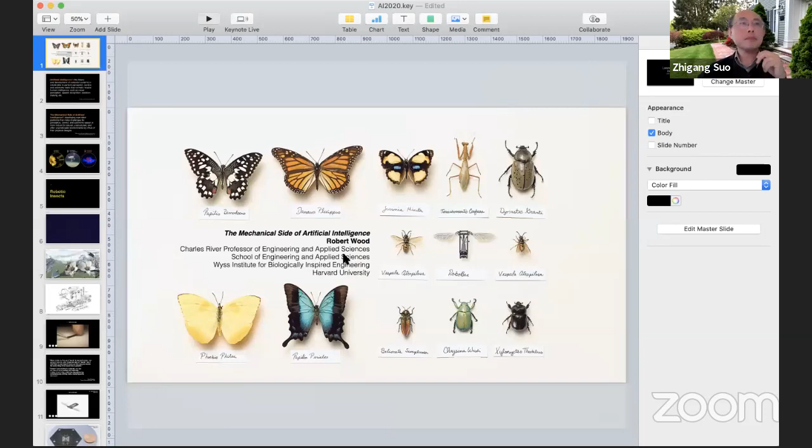Beautiful. Okay, so I'm Rob Howe, and I'm Rob Wood's colleague at Harvard for a number of years now, and it's really been a pleasure working with Rob. I think of him as the guy who can build things nobody else can build. He works at this scale often, too big for MEMS and too small for manual machining using our usual machine construction techniques. So he's been forced to invent a whole technology for fabrication at that scale, which has reached an amazing level of sophistication. I'm looking to hear about the latest today.

It's also forced him to integrate actuation, sensing, and controls. All these parts serve multiple functions, using unique materials combined in unique ways, and the results are quite spectacular, as we'll see. Let me also add, as Rob's colleague at Harvard, that something the rest of the world doesn't get to see is that he is an amazing individual, everyone's favorite colleague. He's won awards for mentoring, for being the nicest guy, working with our staff in the School of Engineering at Harvard. So he's great in his public persona, as we'll hear, and he's also great to have as a colleague. With that, let me turn it over to him, talking about mechanics and artificial intelligence.

Rob. Thank you so much, Rob, I really appreciate the kind words. I'll note, as I was thinking about this morning, it was about 15 years ago, in a month or two and change, that I got a call from Rob when I was sitting in the lab at Berkeley, saying, 'Hey, your interview went well, we want you to come to Harvard,' and he started talking me through all the details of the school and the colleagues. So I appreciate your mentorship and friendship over the past 15-plus years now, and thank you to Zhigang and colleagues at EML for inviting me for this.

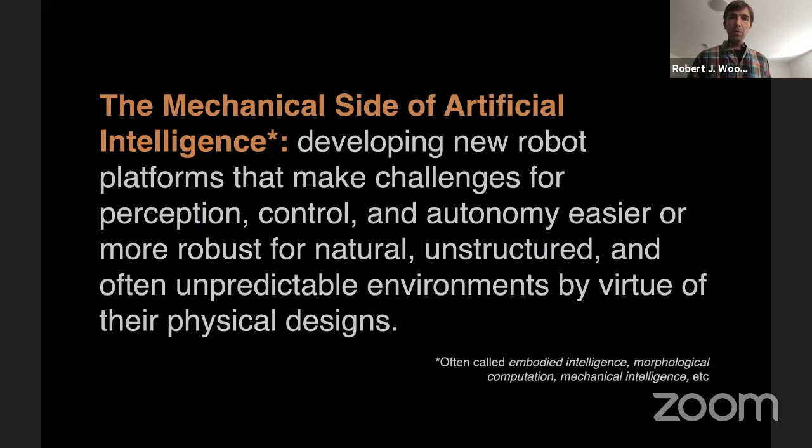I probably won't have time to get too deep into this, but historically, I'd argue this concept is several hundred years old, going back to artisanal tool development and the early days of mechanism design and construction, where there was no computation of any contemporary sort, but they could still develop mechanisms that could do really fascinating things. So it's perhaps a bit of an older concept than AI as we now think about it.

So I'm going to illustrate the way we think about these topics through three examples. The first is on our small-scale robots - some of this will be a bit old, but I'll include new, recent stuff, along the lines of creating small flying robots and small legged robots. Then the last two examples will be in the area of soft robotics, which I'll give an overview of - what that area is, what it means, what it can do, and where it's going. There will be two examples associated with soft robots for manipulation, and questions about future directions, like could we make entirely soft robots?

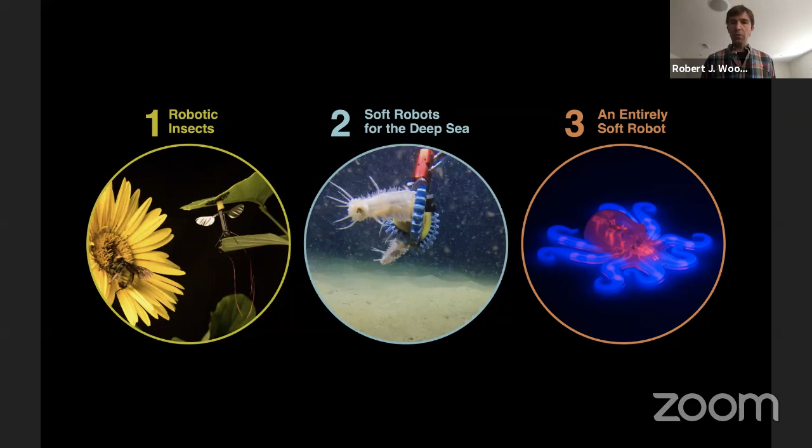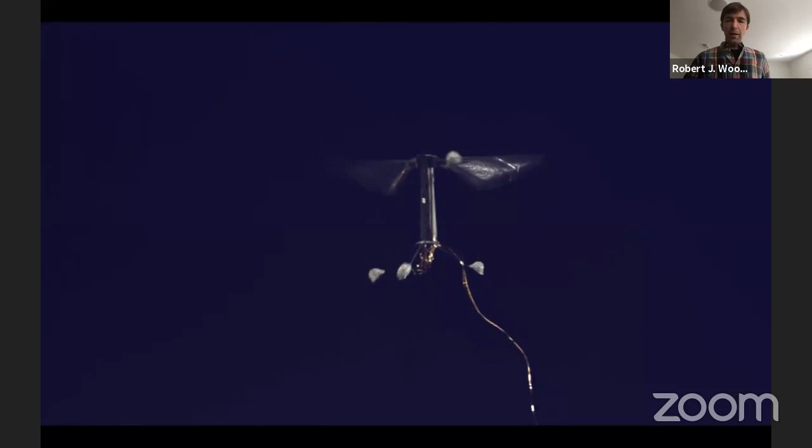So the first is robotic insects. This goes back to my PhD now, and Metin was also involved in this project quite a while ago when we were both at Berkeley, where our advisor at the time, Ron Fearing, set out to build a small flapping wing device that could sustain flight and be similar in scale, features, and flight capacity to an insect, to a fly. In this case I call this a robo-bee, but that's a bit of a misnomer because it's also supposed to invoke some of the social insect aspects that would go into future programming considerations for swarms of these things.

If we wanted to create something like that, here's maybe a vision for this - I won't really talk much about what these might be used for. In reality, we're excited about these topics because they're very difficult and require you to think through system-level questions that go from materials and manufacturing through sensors and actuators, to fluid mechanics, to control dynamics and control systems, to programming aspects, energy, etc. So these are umbrella projects which are inherently very multidisciplinary. That's what gets us excited, but you can envision scenarios for these things being used for, for example, assisted agriculture or search and rescue or other related topics.

So I won't talk too much about that. What I do want to dive into, and spend a slide each or so on, are the challenges that are associated with building something like this.

The first challenge is actually building something like this. The very first thing we started to explore was how to create something with feature sizes that range, like an insect, from centimeter-ish down to tens or hundreds of microns in characteristic dimensions.

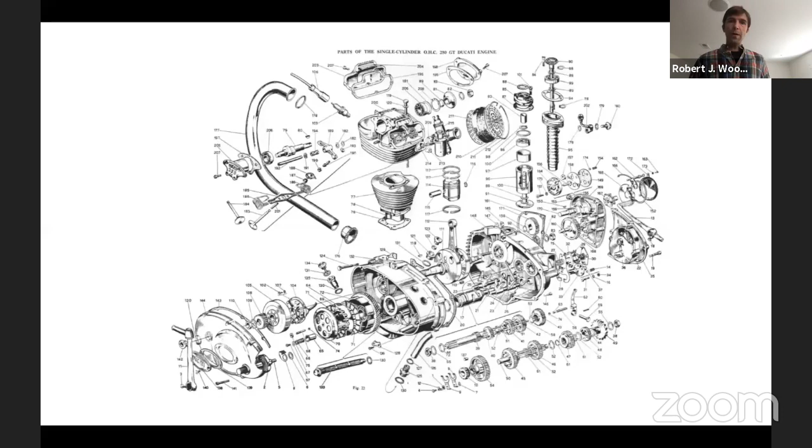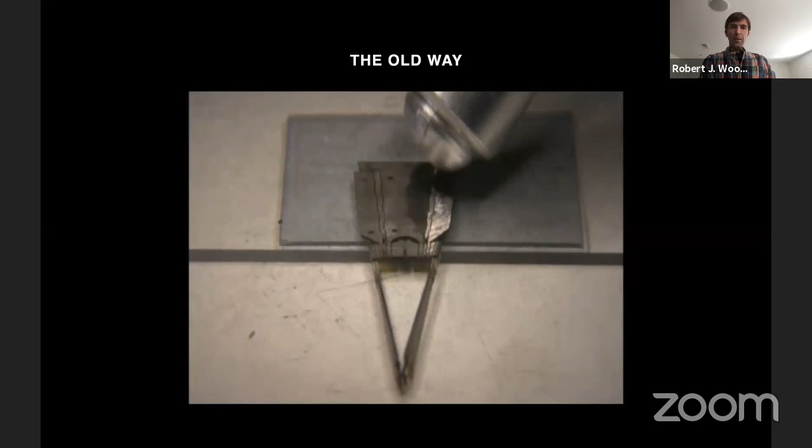And this is a bit of a contradiction of what I just said — this is how we used to do these things. About 10 years ago, you'd have a graduate student painstakingly assembling individual components under a microscope, requiring tremendous dexterity and patience. I'll show you in a moment how those individual components are made.

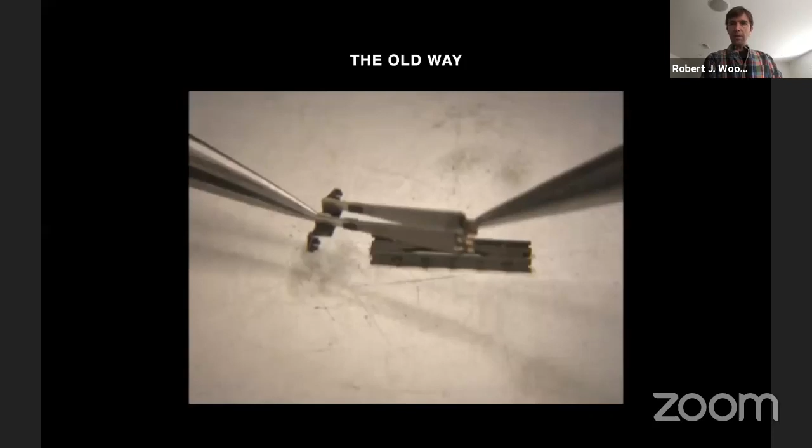This process is also called the 'graduate student with tweezers' process, and it's frankly not very good for graduate student retention. It takes forever to build up the skill to do this, and the precision and yield are not satisfactory. It did yield successful devices and let us make progress, but it was clearly a pain point we needed to alleviate.

So we looked to this rough, approximate quote from Nobel laureate Richard Feynman, from his famous speech called 'Plenty of Room at the Bottom,' where he prophesized solutions to some of these challenges using millimeter or sub-millimeter scale mechanisms and robots. He described the economies of scale you can get at small scales, like robot hands building replicas of each other, multiplying in that regard.

He talked about the economies of scale with respect to operations that could be massively parallelized, by virtue of the features of these small-scale systems he was envisioning.

So we took some inspiration from this, and also from other places, in particular folding-based assembly methods, to alleviate some of the challenges of the more manual operations I was showing in the previous video.

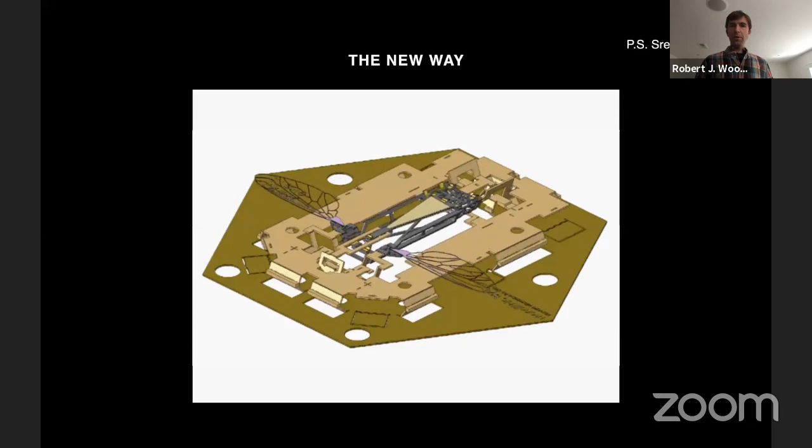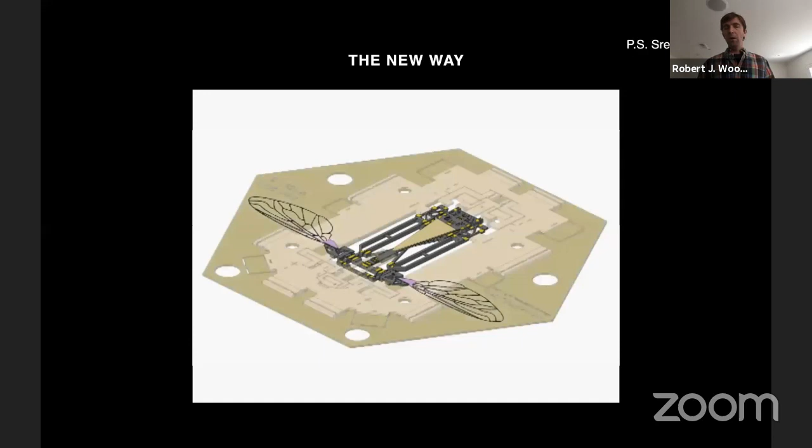We took a lot of inspiration from origami or kirigami, and from things like pop-up books, where you have single degree-of-freedom mechanisms controlled by a single point — pushing, pulling, or unfolding — where all the assembly, like putting a wing here and an actuator there, is done by virtue of the design of parallel mechanisms built within the thickness of the device.

Now, I haven't shown you how this device is made, and I won't have time to get too much into this, but here I'll show you this video of the real thing. This is made in a nominally two-dimensional pattern.

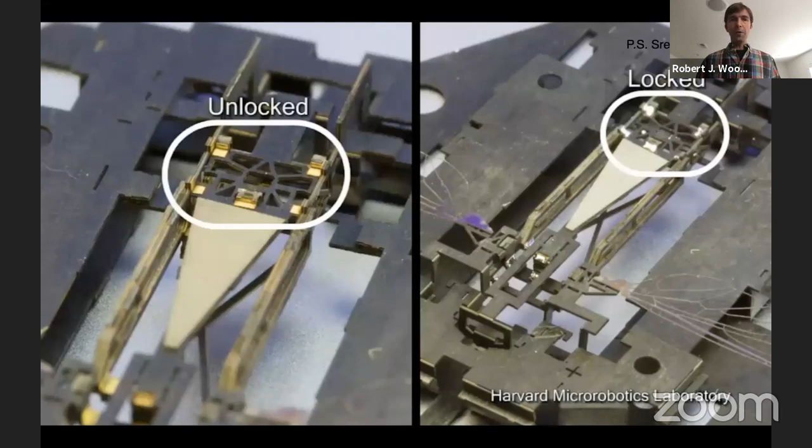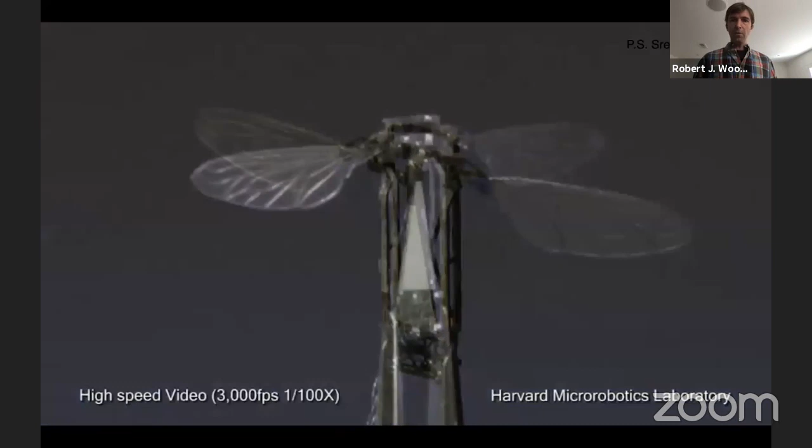We do bulk micromachining of thin materials — polymers, ceramics, composites, metals, it doesn't really matter. We use UV lasers to bulk micromachine each individual layer. We also laser micromachine freestanding thin film adhesives, laying them up using precision pin alignments, then laminate together to get the device shown, which is folded out of plane in a pop-up book-like assembly process. It goes through some fixation steps, is removed from the assembly scaffold, you throw away the scrap, and you're left with this kind of device.

We call this technique pop-up book MEMS, and it has a number of nice features. It allows us to create things fairly rapidly once the designs are done — I'll come back to that in a moment. It also lets us create things in parallel, producing relatively large numbers of devices — though 'large' for us, by the way, is a few.

We can create, and this is provable, any three-dimensional object with any sort of articulation using these techniques. The articulation in these devices is based upon gaps in rigid materials that expose a flexible material, typically something like polyimide or other similarly resilient polymers. These are based on flexure hinges, which allow us to do not just the folding for assembly, but any sort of motion we might want.

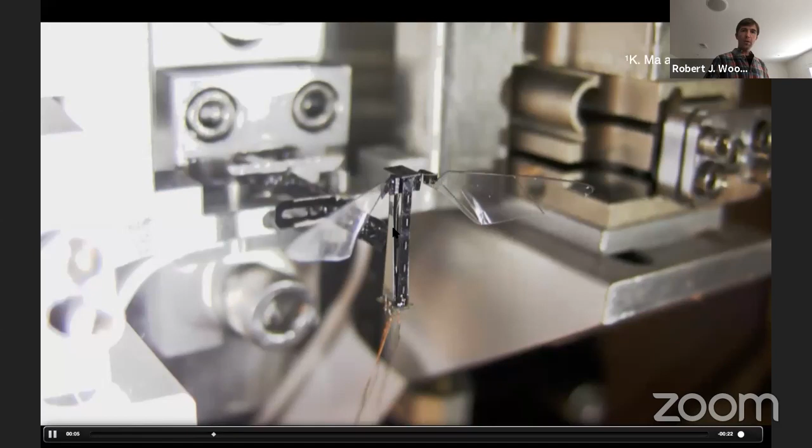So the flapping of a wing, for example, is controlled by this piezoelectric bimorph bending actuator, which we create in the same laminated process. What's happening here is the motion of this small actuator is being amplified by something you can't quite see: a parallel 4-bar mechanism, a crank slider mechanism, which converts that relatively small motion into a large flapping motion.

Coming back to the original thesis I wanted to present, about using the design of this device to alleviate some of the challenges down the road, I'll show you in a few moments that when I plug these in and try to fly them, they're extremely unstable. So having active control is absolutely necessary.

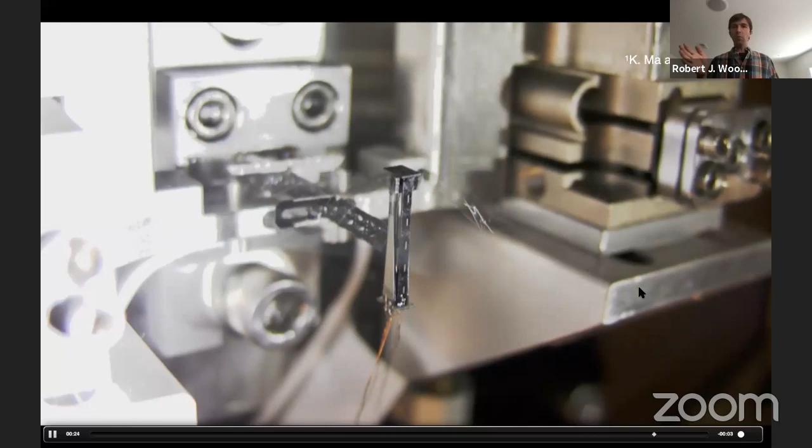At the genesis of this project, we worked with biologists who were studying insect flight, Michael Dickinson and his colleagues, who at the time were at UC Berkeley. They described some of the principles behind how insects operate, abstracting all the details down to a 2 degree of freedom motion, where you have a flapping motion and a simultaneous rotation about an axis roughly parallel with the span-wise direction of the wing. So you get these treading water motions.

Our initial attempts were, somewhat naively, to try to recreate that 2 degree of freedom system as a 2 input, 2 output system, with 2 actuators driving 2 rotational modes. That turns out, for a system like this where we want, for efficiency reasons, to drive at the resonance of the flapping structure, to be rather inefficient because of coupling. You're always going to be putting energy into fighting modes in the system.

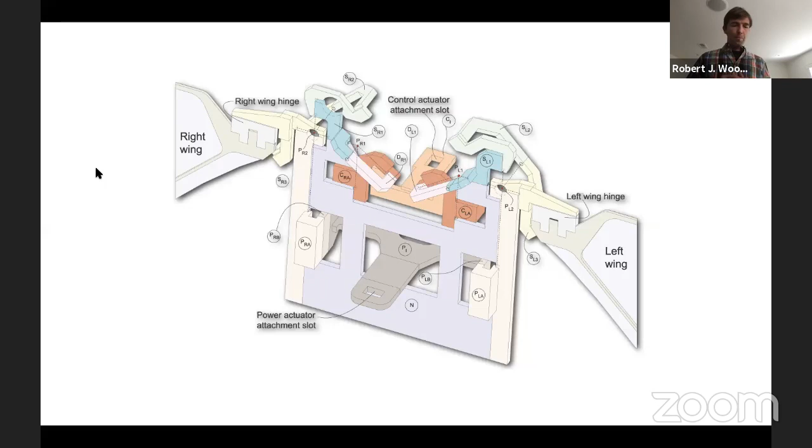So we were able to come up with methods that would allow us to create a more complex example of the previous device I just showed you. If I go back for a second, I don't think I made my main point, which was: this 2 degree of freedom motion we wanted to achieve failed when we thought about it as commanding those two motions explicitly, or directly.

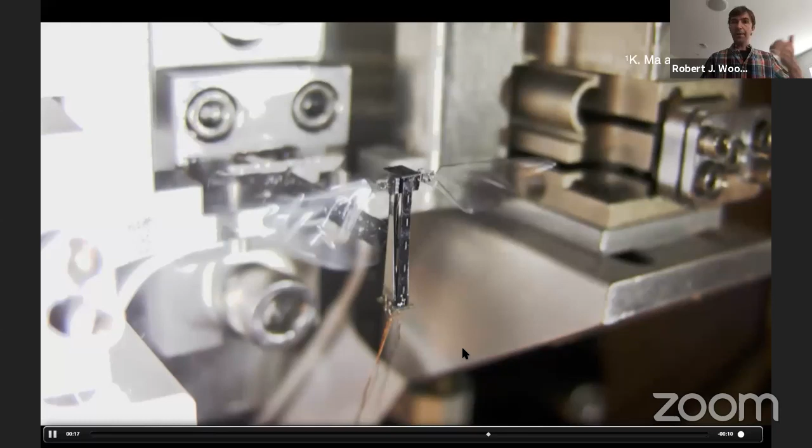Whereas in this device, we can have a passive mode. This rotational mode is passive, and just by controlling the stiffness of the flexure hinge that connects to the wing, and the inertial properties of the wing, we can put that mode much higher than the flapping resonant mode. So we can have quasi-steady operation of that rotational mode. There's a whole bunch of nuances that make getting some of the details right really important. For example, if the phasing between these two modes is incorrect, you're going to get negative lift, and obviously you don't want that.

So we can make variants of these mechanisms, and I'm only showing these couple slides to show the sorts of complexities we can achieve using the techniques I showed you before. This particular mechanism is based upon, I won't recall all the details, but two parallel 5-bar mechanisms, 2 parallel 4-bar mechanisms, and 2 planar 4-bar mechanisms packed into a device that's a few cubic millimeters in size, or let's say a cubic centimeter, and we zoom in to see the complexities we can achieve here.

Again, this is all based upon these lamination and folding techniques to create these articulated mechanisms. You can kind of see here a flexure mechanism—I assume everybody can see my pointer—and then more rigid links that are based upon, in this case, fiber reinforced composite materials.

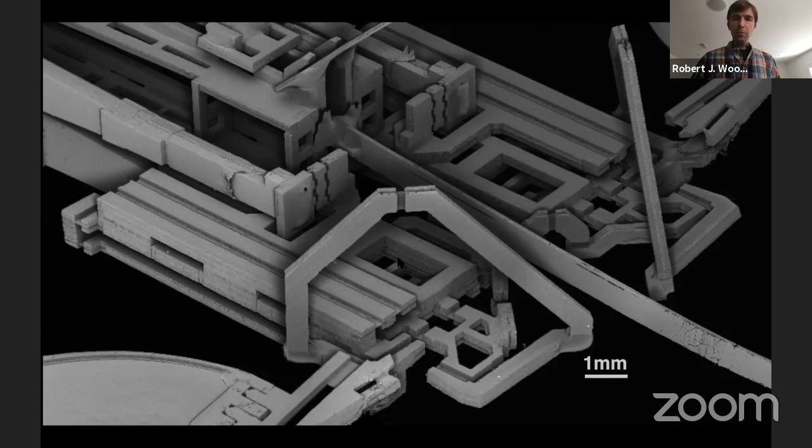Let's see, and what else do I want to say here? I guess that's probably it. But we can make these really elaborate mechanisms using some of these techniques.

So the next question that we had was regarding controls. So jumping ahead a bit, we tried to think about separating the questions about the sort of control algorithms that we might have or might want to have from the actual hardware that's going to implement them. And specifically what I mean is, we sort of set up this environment where we have training wheels, effectively training wheels,

where we have this sort of motion capture environment with cameras that are sort of around a flight volume. And this is a very typical setting that you might have for motion capture for larger scale drones or a whole bunch of other robotics activities. But the interesting difference here is that, of course, it's scaled way down. We're talking about maybe a cubic foot of volume in which we're flying.

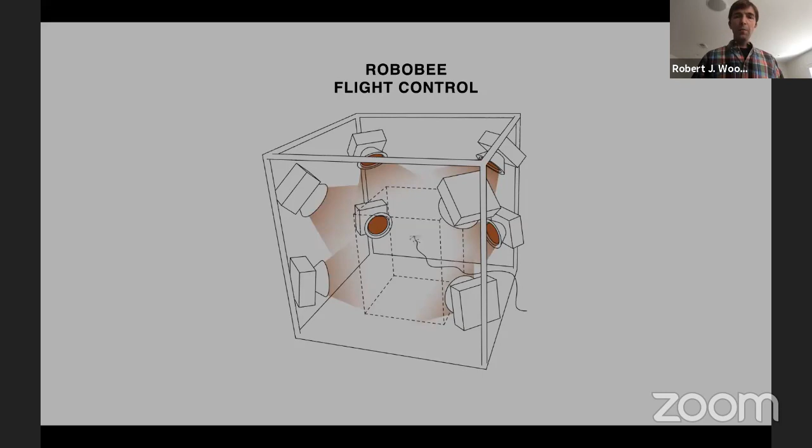And so that allowed us, and what's not depicted here are sort of banks of computers that can be implementing whatever sort of control mechanism that you want. Here's the setup that we have. Here's the device in question.

So through some extensive tweaking, et cetera, we're able to get pretty good real-time feedback, with latencies on the order of maybe 10 to 20 milliseconds, or maybe even less than that, which allows us to do real-time state estimation off-board and allows us to write controllers that can stabilize flight. So that's a huge tool for us to, again, separate out these questions of the algorithmic side of control from the implementation side of control.

And so this is what happens if I just sort of set these things down and press go. Open loop, they're very unstable. Notably, this is not slowed down by a factor of 8. So this is in real time now. And what you're seeing here is just a sequence of training flights where we are learning some of the dynamics associated with these devices.

We model these, we simulate these things, and we put a lot of effort into fabricating things repeatedly. But at the end of the day, of course, there's fabrication errors that creep up, there's defects, et cetera. And so given the open loop unstable nature of these types of devices, which is the same for their insect counterparts as well, in the absence of active feedback control, they fall.

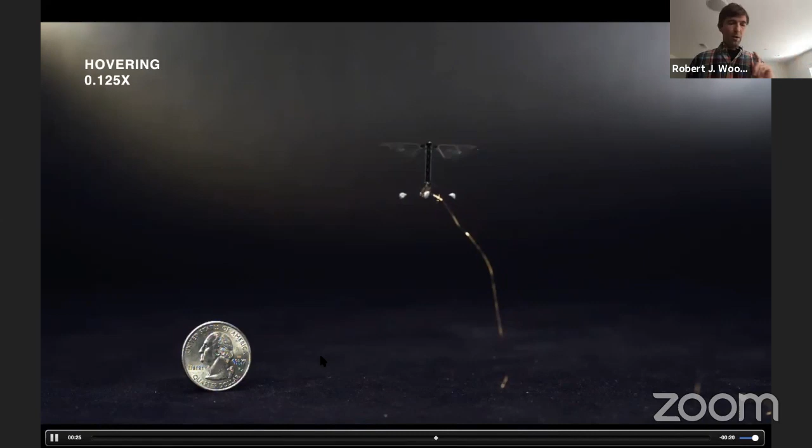And so this is what happens if you get the control system correct. This is just simple hovering, and hovering might seem very simple, and indeed it is. But going back to this thesis, the use of hovering as a demonstration here is strategic because in the absence of forward velocity, there is no mechanism, save one, that we could employ to get passive stability.

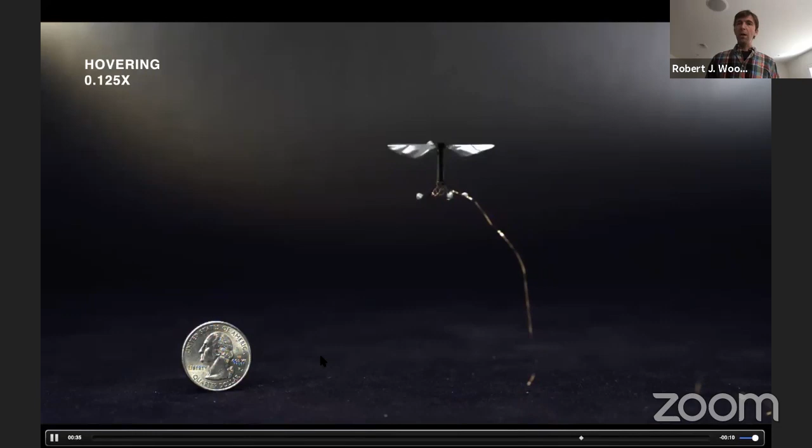It's unlike a fixed wing aircraft where we could have, for example, a positive dihedral on the wings. And if the pilot removes his or her hands from the controls, then the airplane assumes a stable configuration and does not plummet. In this case, we have no such mechanisms that we can employ. Again, there is one exception, applying aerodynamic dampers, and I'm not going to talk about that today. But we chose hovering just to illustrate some of the challenges associated with trying to achieve stable flight.

But we could go beyond that, and so over the course of the years, we've done a bunch of fun experiments, now actually getting into the algorithmic side of controls that is enabled by the fact that we can build these platforms. One of the other things that you will probably note, not in this video, but in the previous ones, is that these things crash. Maybe not so much these days, but in the early days of these experiments, we didn't bother to try to land them softly. We just turned them off and they crash.

And this is just due to simple physics of scaling arguments. Dealing with things at these scales is a real pain, of course, to build and design, et cetera. But we do get some wins, and this is one win. They tend to be more robust at these physical scales than, let's say, a larger scale quad rotor would be. You certainly wouldn't want to crash that. You certainly wouldn't want to have humans in close proximity with drone experiments. With these ones, it's no big deal.

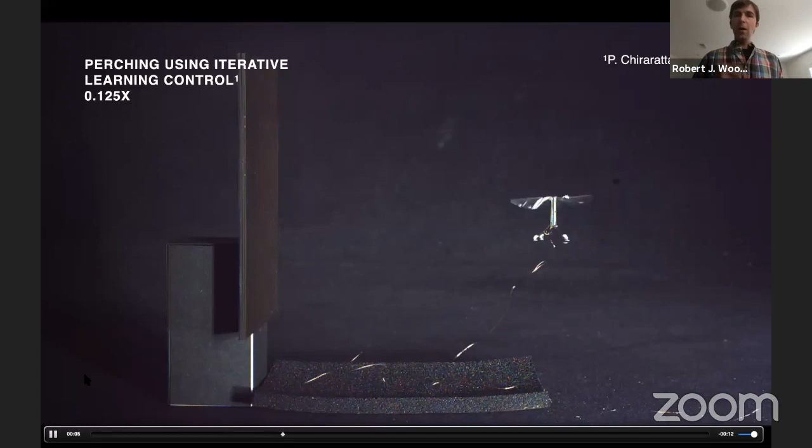This is an example of something called iterative learning control, where this is trial 8. The first 7 trials failed for this aggressive maneuver, but we were able to learn through analyzing the trajectories in the state space for this robot some unknown dynamics, and then use that to learn better control policies that allow us to do this aggressive maneuver.

More recently, if I think about the list of problems that we would have to solve in order to achieve this vision: how do we build them? Okay, great, we have some solutions and knowledge on that and the associated materials and processing steps. Next one would be, how am I going to actuate them? There's no electromagnetic motors off the shelf that would scale to these physical scales and be remotely efficient enough to operate these things. They're piezoelectric bending bimorph actuators. We've had a solution for that for a while now. They're okay, they're not perfect. They work well enough, but they have some nuances associated with them.

One is that, somewhat ironically, the vast majority of the weight of these devices is lead, because they're lead-based piezoceramics. The other is that they require relatively high voltages to operate, which is a challenge for bringing these things to autonomy. So what we did over the past couple years is try to address this question of power and power distribution so that we could eventually get rid of the tether, which was providing both the power and control signals you were seeing in all of those previous videos.

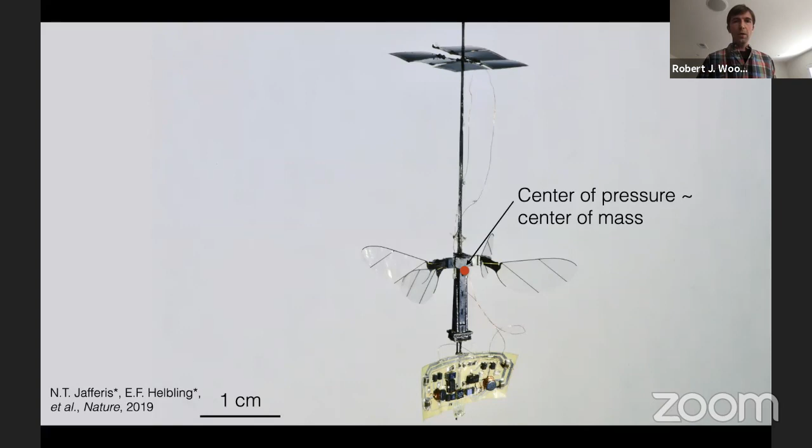We took the characteristics of these piezoelectric actuators, which you've seen operate in the past videos. They're basically two parallel plate capacitors that electrically represent the piezoelectric elements in this actuator. They're a bending bimorph, so they actuate 180 degrees out of phase and produce this oscillating motion. But they do this at relatively high voltages, on the order of 100 to 200 volts.

So we have put some effort into developing relatively simple, at this point discrete component versions of some drive electronics. What's depicted here is a combination of a boost stage, which takes in this case solar cells operating at 3-4 volts open circuit. We've done a number of different versions of this, mostly transformer based, autotransformer based, or flyback converter based boost circuits, which can take that up to whatever voltage rail you might want, again 100 to 200 volts, and then drive these capacitive elements which represent the plates of the PZT actuators.

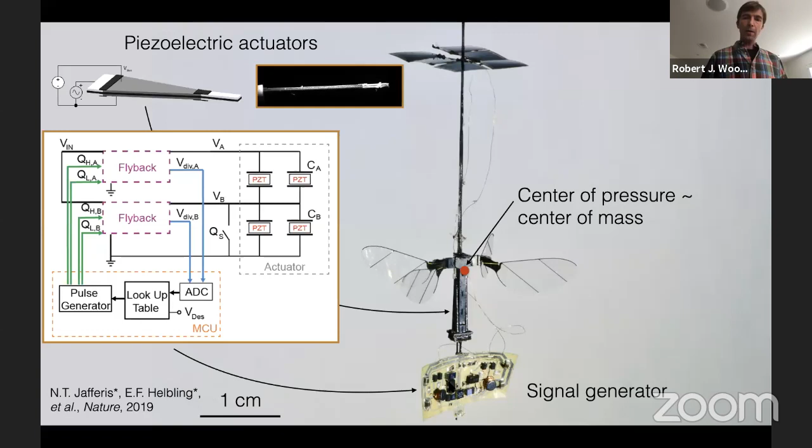That's done based upon some very simple local feedback on a little microcontroller, and that allowed us to do the first demonstration of untethered flight. There's a solar cell sticking on top here. It looks kind of unwieldy, but there's a solar panel up here and a set of lights up here effectively powering this thing. I should note that this is greater than one sun. We're trying to get the efficiency of the system, mechanical, aeromechanical, and electrical, up such that we can fly at one sun, and we think we're pretty close. But this nonetheless shows that we can integrate all the electrical components associated with driving.

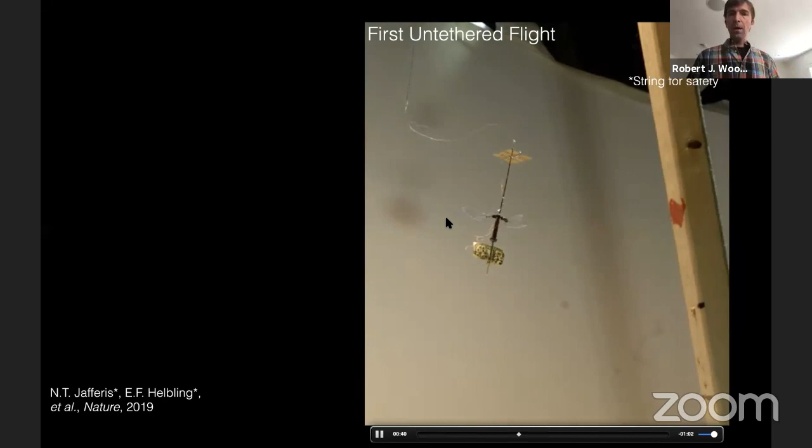Now, this is also just open loop. We're not doing any feedback control here. The way we can get away with that, which contradicts what I said before about these things being open loop unstable, is that we just messed with the mass distribution. So it's still unstable, but it's able to have flights long enough that we can prove our point. This was on the cover of Nature last year.

There's a whole bunch of things that we're currently trying to solve with these types of devices, things like refining some of these power circuits. We think we know what sensor information we would need to do reasonable state estimation, and now we're trying to package those things at small enough scales. And then of course, embedded systems questions for how we would actually implement the control. These are things that we're currently working on. But at the same time, since we have these devices, we can also do some fun explorations of it.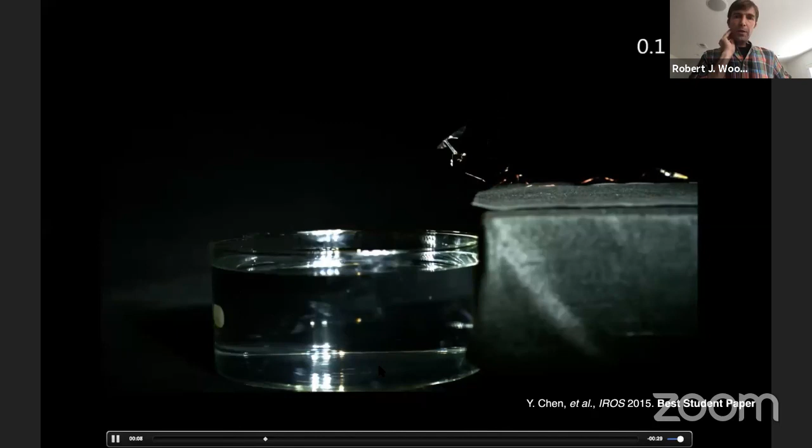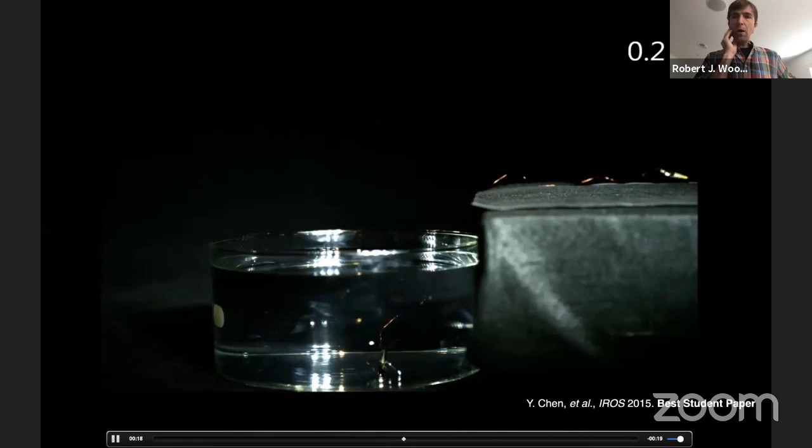And one of them is this sort of vision of multimodal locomotion. And if that doesn't make sense, here's a vehicle, and I'll come back to this in a minute. Similar kind of thing, but we realized a few years ago, one of my students realized, this is Kevin Chen, who's now assistant professor at MIT. He was studying some of the fluid mechanics of these devices, and he realized that, well, if you fly these things around in air, and if I now change the fluid to water, and I just slow down my flapping, I get a very similar fluid mechanics.

And so what this means is, I didn't mean to stop that. What this means is that we can then have these things, which is hopefully being shown here, swimming around in water. So we can do control of flapping motion in water in a very similar way as we do flapping motion in air, and produce very similar flow structures to produce thrust. And so, okay, well, that's fun.

Getting into water, as you just saw, was relatively easy. Getting out is very, very hard. And that's something which is maybe intuitive, that the surface tension forces that are associated with this robot emerging from water are far, far greater than its weight, and far greater than the thrust that it can produce.

And so the same student, what he was able to do is produce an impulsive mechanism whereby there's little electrodes in that vehicle, which then break down water through electrolysis into oxyhydrogen, and then ignite it, and then it just bursts through the water and is ready to fly again another day. So that was a fun one.

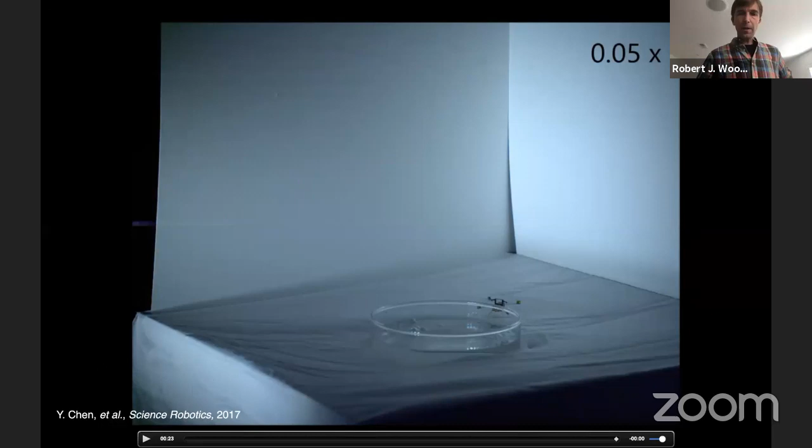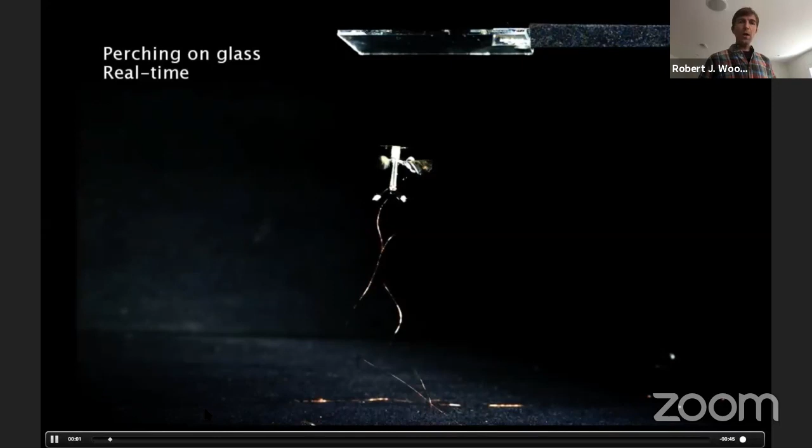We also did some, again, taking advantage of some of the physics of scaling here, take advantage of electrostatic adhesion to be able to create perching mechanisms. And this is something where we were able to show, so there's some bioinspiration here, which is maybe hidden, of how we would think about control strategies for approach.

We took some inspiration from work by researchers who were exploring optical flow guided control strategies for approaching and landing on objects. But nonetheless, there's some interesting things here where we can perch on and take off from natural and artificial substances just using a very simple electroadhesive mechanism.

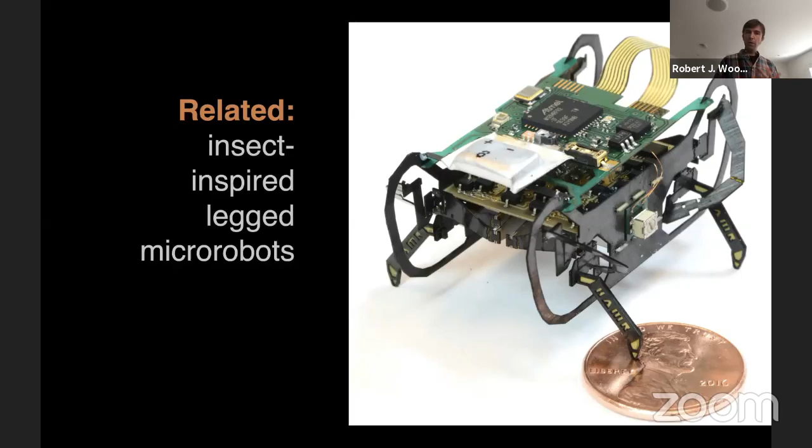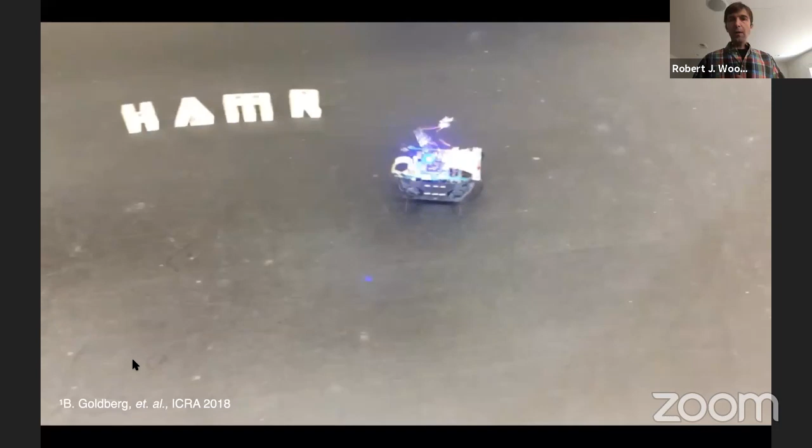And then I want to switch gears slightly to say that we realized, of course, that if we can make little flapping things, we could make little mechanisms that could do other things like legged locomotion. And so we have a platform now that we called HAMR, the Harvard Ambulatory Microrobot, where we can create legged devices, which again have a lot of bioinspiration. This is a quadruped, although it takes a lot of its dynamical inspiration from insects, cockroaches, etc.

And one thing that I think is nice about this sort of platform, well, a couple things. One is that first, we don't sacrifice complexity as a function of scale. So if I think about a larger robot, an Atlas or a Spot or something like that, and I think about all of its actuated degrees of freedom as maybe a measure of complexity, I would intuitively argue that as I scale such a device down, I'm going to lose some of that complexity just for practical reasons.

Now, with these types of techniques that I showed and described to you earlier, we don't sacrifice that. We can create mechanisms that have many actuated degrees of freedom. We've created little myriapod-inspired things that have 20 legs and 40 actuators, all in the few cubic centimeter size range.

The other thing is that, if you're not flying, these legged systems, of course, have more payload, so you can support more other systems here. And so these are fully autonomous now, where we can have power, control, and communication systems all embedded within these. And you can do other fun things with these devices.

One is gait studies. These aren't showing any particularly useful locomotion mode, but they're highly energetic. They have payload capacities in excess, in some instances, up to 10 times their body weight. And so they can do rather energetic things.

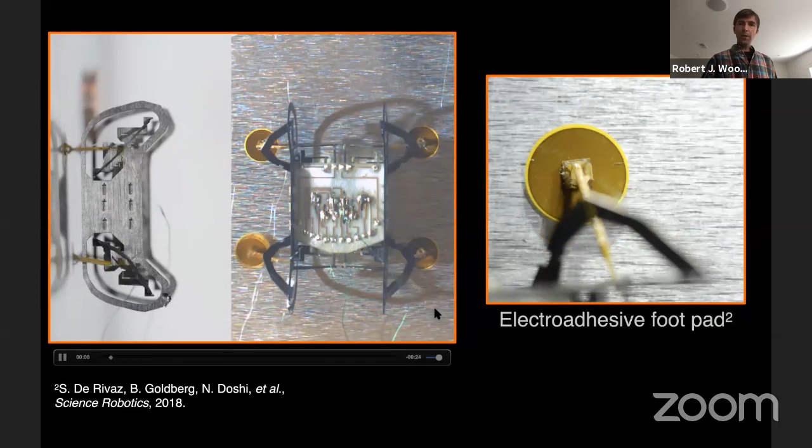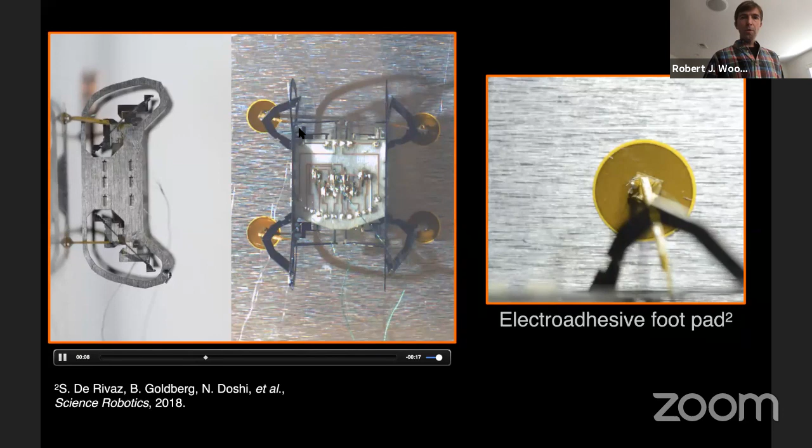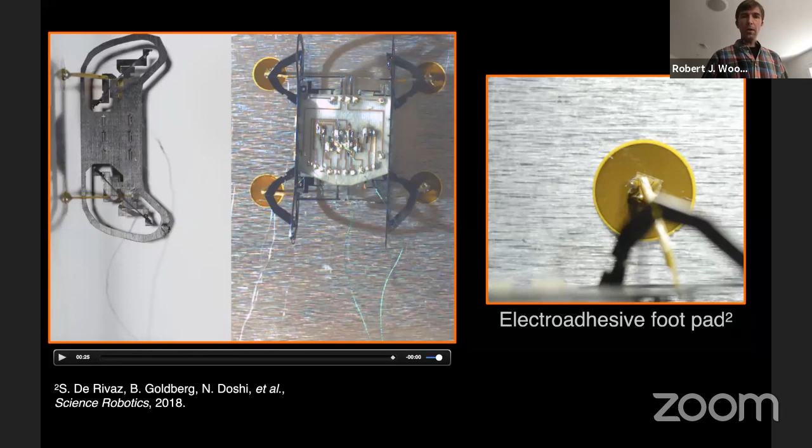So we further developed this platform to have electroadhesive feet, illustrated here. Here's the adhesive pad on a conductive substrate, but we're also simultaneously working on non-conductive substrates, which is much harder. Same sort of robot here, a spherical 5-bar mechanism with 2 degrees of freedom, and then a passive spherical 6-bar at the ankle, allowing for 3 degrees of freedom of rotation at the base of the foot to accommodate not just the motions of the legs themselves, but also any asperities or surface curvatures.

This is a fancy video where you're supposed to realize that the gravity vector is indeed pointing downwards. So this is inverted locomotion on a metal substrate using these electroadhesive pads. The nice thing is that we're already operating with high voltages, the same ones we're using to drive the actuator, so it's no greater electrical complexity than we had with the previous devices.

We can do other fun things like multimodal locomotion, where we have these weird looking feet on these devices. Through a combination of passive flapping-like paddling motion and controlled electrowetting, where we control the contact angle of water on these electrode surfaces by applying an appropriate electrical field, we can do demonstrations like walking on solid land, transitioning to floating on water, and then through controlled electrowetting, sinking by removing those surface tension forces so we can break the surface of water and locomote on the subsea floor using standard typical gaits.

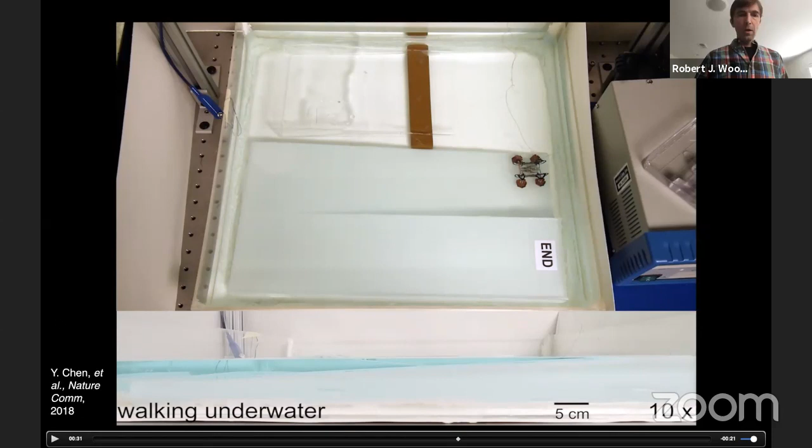So that was one half of what I wanted to talk to you about. I'm going a little long here, so I'll try to move more quickly. What I want to talk about next is soft robots for the deep sea. This is our foray into soft robotics for manipulation. I'm going to let this play and you can hear what's happening here.

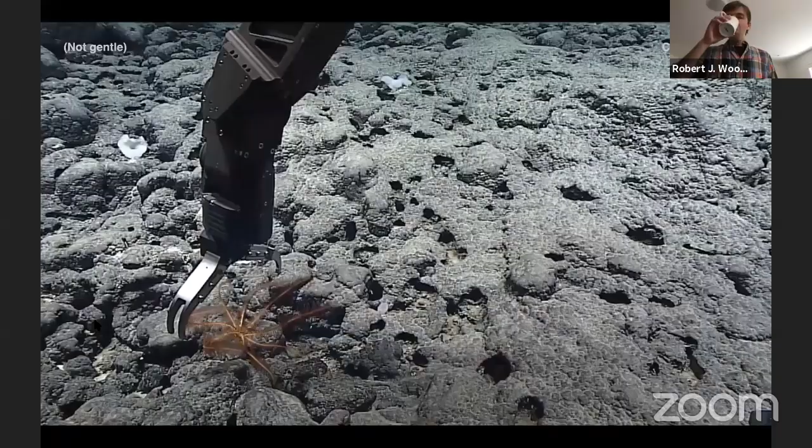No, I'm not sure he's going to swim anymore. There he goes, and it's sideways. He's swimming. I told you he'd swim sideways.

The commentary is kind of amusing, but the high-level idea is we got involved with some marine biologists who were trying to do things like you just saw. They wanted to go down to the deep oceans and sample creatures that maybe had never been explored before or were underexplored. But they were using rigid gripping mechanisms meant for the oil and gas industry, and specifically, they're way overpowered for something like this, and their precision is also quite lacking in terms of things like force feedback.

And this is bad, right? If you just want to get a sample of this thing, sure, you can just mangle it, grab it, and bring it back up. But what you really want, as I've learned from my colleagues, is to get them in an unstressed state, meaning you don't want gene expression that's unnatural for them for their environment. You want to get them whole and happy.

So in order to do that, we said, well, at the time—I guess 7 years ago now—we were making these kinds of things, which were very simple structures: elastomer bladders that had some fiber reinforcements within them. Based upon the nature of the fiber reinforcement, I could control the motion of these things to create pure extension, extension-bending coupling, extension-twisting coupling, bending-twisting coupling, whatever.

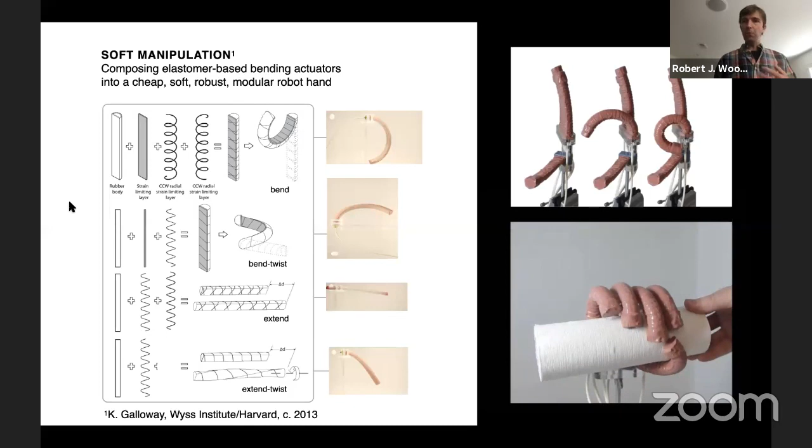All we do is just pressurize. We inflate to a certain pressure, and by virtue of the compliance of the materials and the working fluid, we can have stable grasping on a variety of objects. And furthermore, because we're more impedance matched, if you will, to delicate objects that we might want to grip, we can do this in a delicate way.

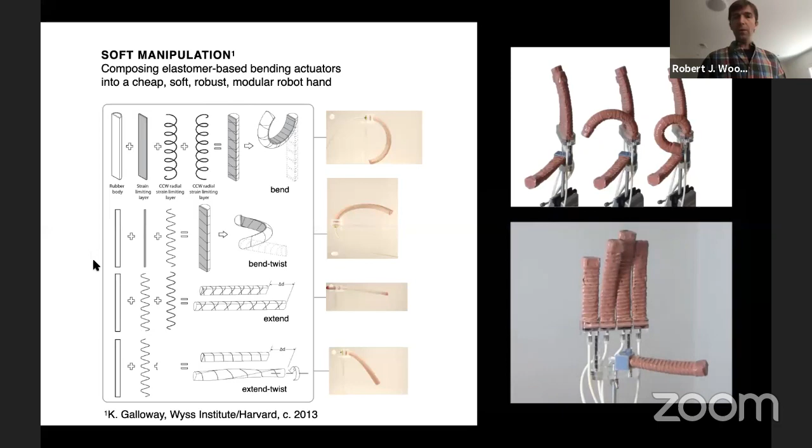And so this got us interested. This is sort of how we got involved in soft robotics. As a sidebar, soft robotics is a very active subfield in robotics over the past decade or so. It started back in the 1980s with a guy named Suzumori in Tokyo, who was building some really fantastic examples of small scale, pneumatically driven, multi-degree of freedom soft actuators, and gripping and crawling mechanisms.

There were other examples over the ensuing years, but this really started to pick up speed when DARPA had a program called ChemBots, chemical robots, the idea being, as the name implied, non-traditional soft-bodied robots powered and controlled in interesting ways. That led to a number of interesting results.

Fast forward a little bit, now we have Soft Robotics as a journal, which was, until Science Robotics took over, the highest impact factor journal in all of robotics, which says something about the community's interest in these areas. So we got some funding from the National Geographic Society, and took one of my colleagues' remotely operated vehicles, hooked up this soft robotic hand, and went over to the Red Sea. This is a recognition to our sponsors, of course.

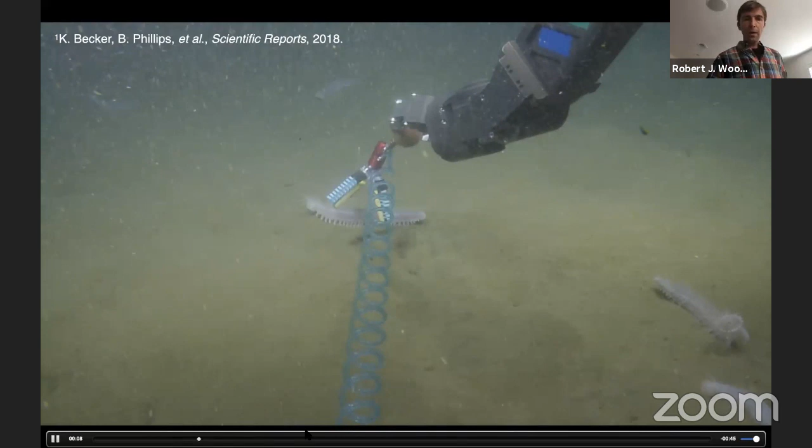We took this on other cruises. This is on the Nautilus, where we joined a couple of cruises and took this down to even much greater depths, in this case 1,800 meters, to grab these rather alien-looking creatures called Holothuria.

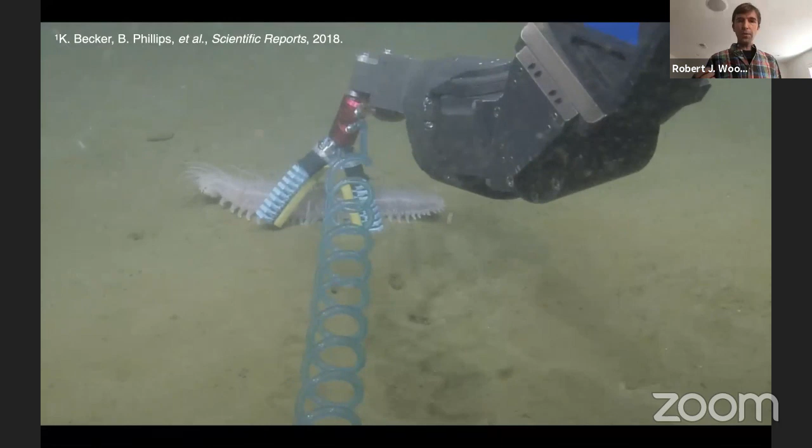These are just sea cucumbers. Long story short, we could grab these things, whose consistency is like wet tissue paper effectively, but nonetheless we could grab them, and they were rather happy to be picked up and put down.

So again, more proof of concept. We could also grab more rigid yet delicate things like this crab, and he tries to get away and we capture him. 'Oh, don't let me go. Okay, bye now.' Anyways, we can capture a whole bunch of different kinds of animals using these techniques, and that has been quite successful.

We also applied these concepts on another cruise to a manned submersible, where an operator wears a wearable sensing device as an input, controlling the motions of a whole compliant arm composed of multiple segments that can articulate in space as well as grasp. This is controlled through teleoperation, with one of the operators inside wearing the device.

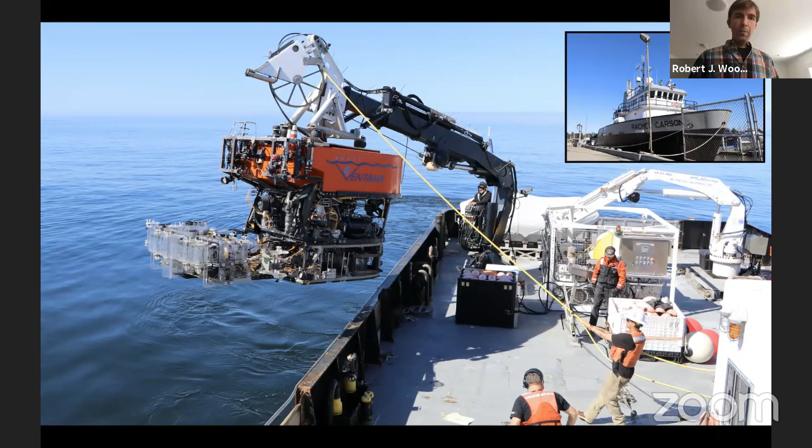We also linked up with the Monterey Bay Aquarium Research Institute in California and got on board one of their ships to pilot a prototype device. This takes the notion of delicate interactions one step further. It's not a soft device, but a rigid folding mechanism.

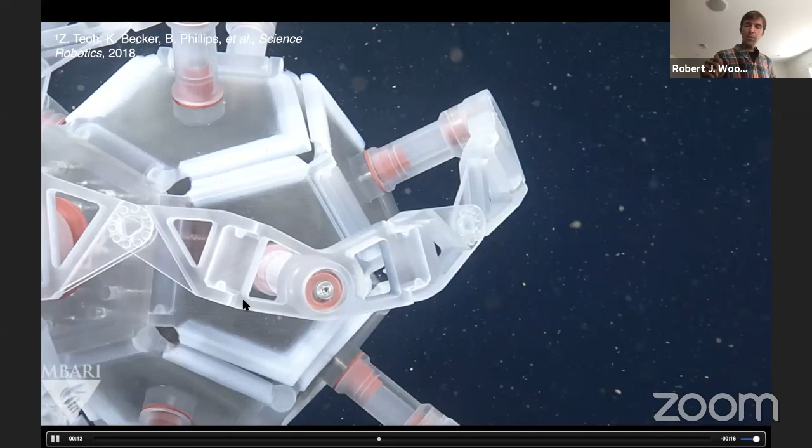The idea is that if we want to study an animal, perhaps a mobile animal in the water column, we can capture it without ever really touching it, although we did anger it since it squirted ink at us. We can do non-contact measurements like morphometrics, chemistry, or respiration without damaging or touching the animal. This comes back to the theme of being respectful while sampling and getting things in their natural state. Some creatures, like coral, can grow to be thousands of years old, so we don't want to damage those ecosystems.

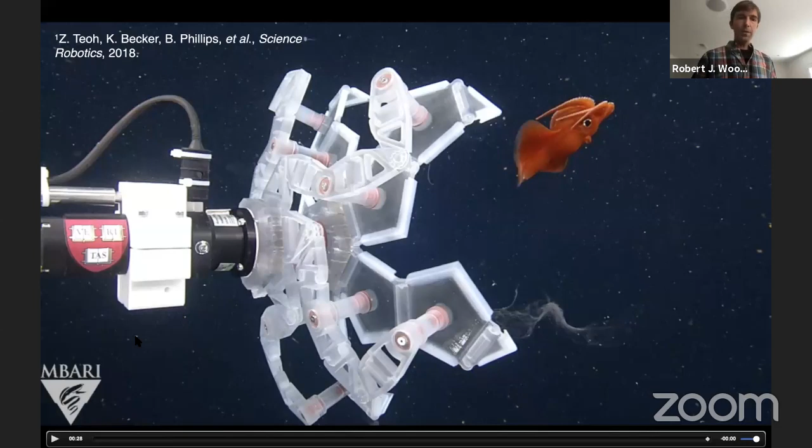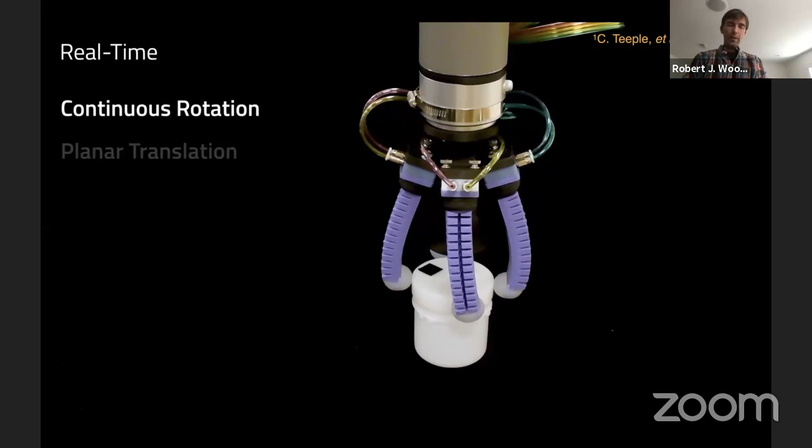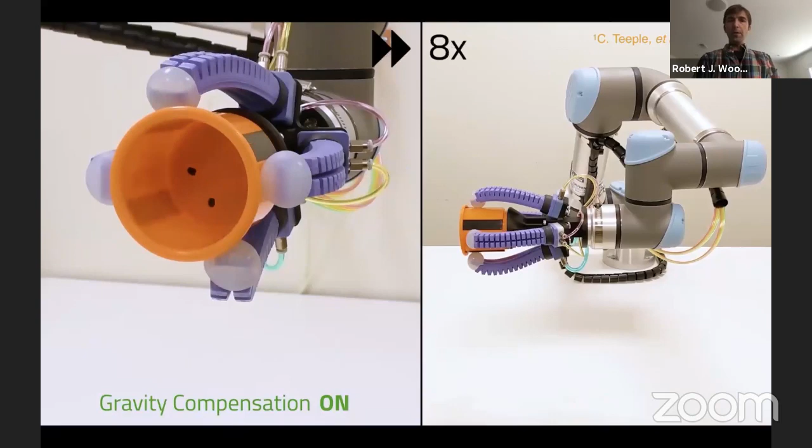We've also taken these manipulation concepts further. While effective at grabbing things, that's about all they were good for - we could pick things up and put them down. We wanted to explore, for general manipulation tasks, whether we could use the same techniques but add more articulation and degrees of freedom for more dexterity in things like in-hand manipulation - not just a stable grasp, but actually manipulating objects within that grasp.

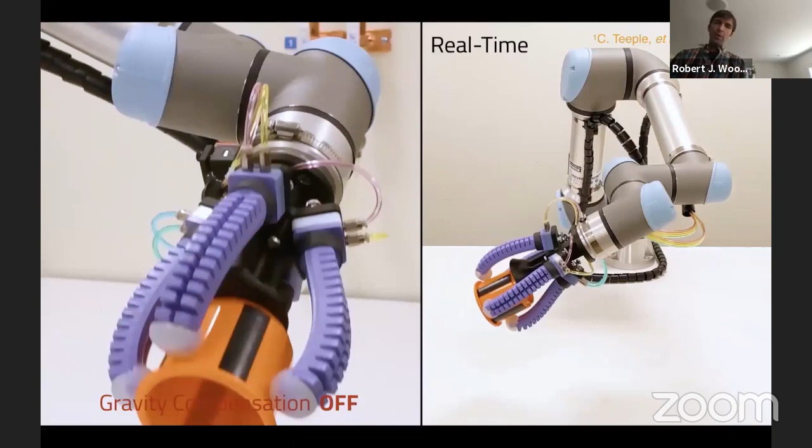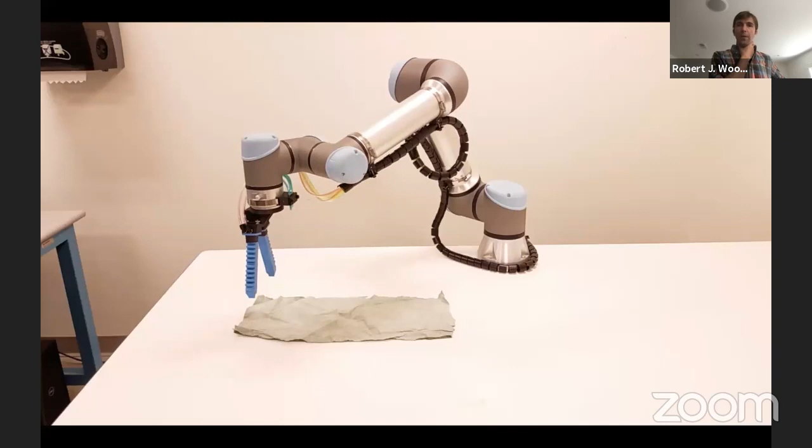This relatively simple device takes the same soft actuator mechanism I showed you previously and splits it in two, so I have two chambers per actuator now. This gives not just a bending motion but also a lateral motion, and I can control gaits to do things like rotations. If we do something slightly different, we can have two degrees of freedom in series, giving robust pinch grasps on thin or compliant objects like these sheets of material. This is ongoing work on what we can grasp and manipulate.

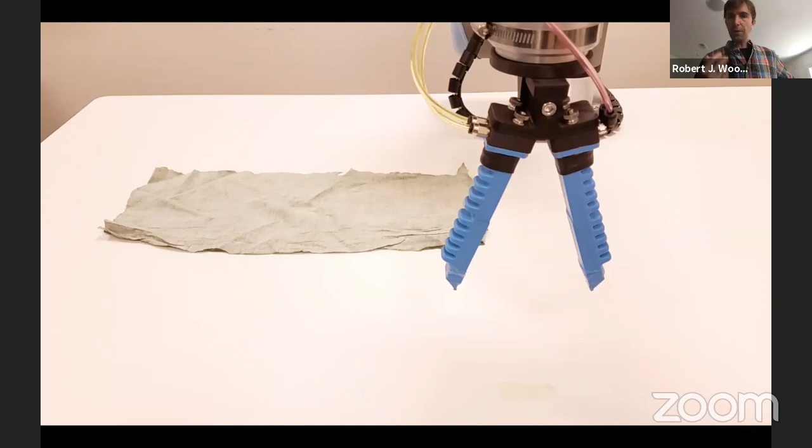That's one layer with these soft manipulators. But how can we enhance the dexterity of these things further? Could they eventually be appropriate for human-type tasks, or human-level dexterity for household tasks, for example? And here, this is the same device folding a sheet.

Ideally, all of the things I just showed you are fluidically activated, which is fine if you don't care about having a fluidic tether - totally fine for our deep sea explorations since the working fluid was seawater, no big deal. But for applications where I might not want that tether, I think I'd want something that's electrically activated.

Another aspect is skin-like soft sensors, and I'll mention that in a minute. The energy storage I haven't talked about, especially for electrically driven things, but also fluidically driven things. Embedded controllers and manufacturing strategies. I'm going to talk about these last three in the last example, but first a couple of examples of what we're doing along the lines of artificial muscles, electrically activated artificial muscles.

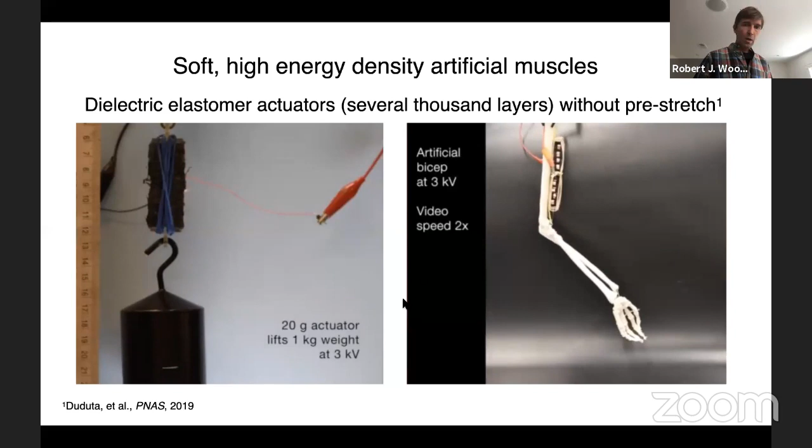Another area we've been looking into is wearable soft sensors, skin-like soft sensors. This is something we've been doing for a while with a few different collaborators - at Harvard with Connor Walsh's group, and at MIT with Dava Newman's group. We've been looking at this concept of fluid elastomer composites.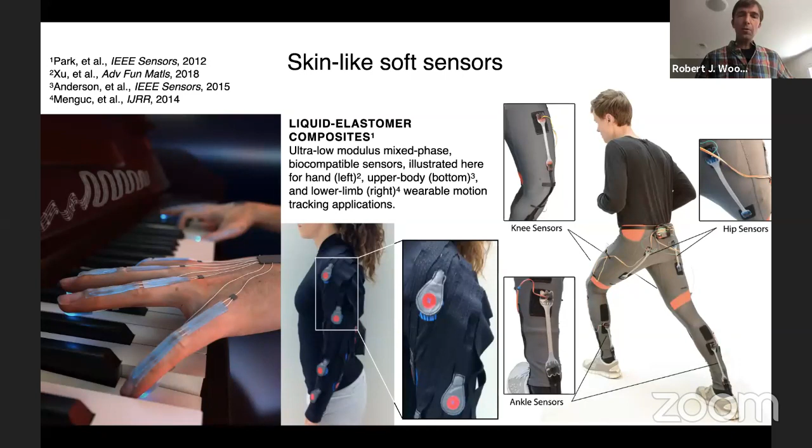Liquid elastomer composites is the typical architecture we use, and they look kind of like this. This is a bit old now, but the idea is I've got an elastomer with microchannels filled with a room-temperature conductive liquid metal. By virtue of the design of the geometry of these channels, I can create highly effective multi-axis sensors, which you can kind of see in this video.

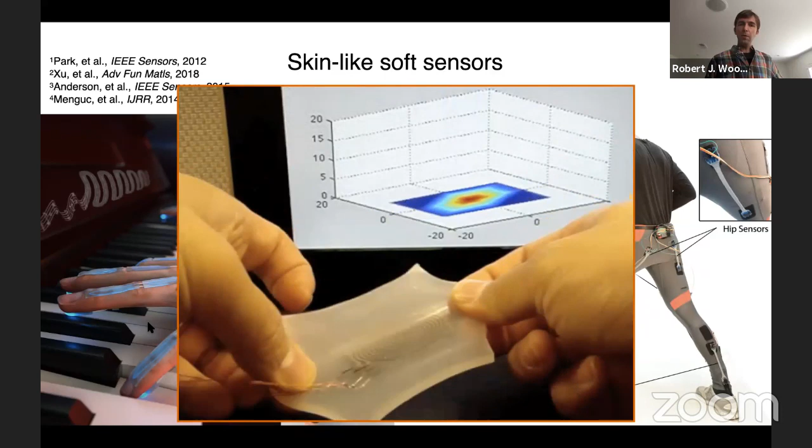I can create normal pressure sensors, and then sort of in-plane strain sensors, all with materials that are limited in terms of their modulus by the elastomer matrix modulus. There's a whole bunch of nuances of the materials aspects, particularly of the liquid that's chosen here, but I'm not going to get into that. We can also do shear mode sensors and bending sensors using similar deviations from these microchannel geometries.

Now, last topic. In the soft robot examples I showed you - whether the soft underwater manipulators or the dielectric elastomer based actuators - there are some rigid components in these systems, meaning there's a rigid battery, pump, accumulator, microcontroller, or whatever. Typically what we found in our work and other people's work is that the business end, the end effectors of these things, are soft, but the rest of the systems are more traditionally hard, and that's fine. I think that's appropriate, and I don't think we necessarily want soft robotics to take over all of these nuances.

But in an exploration with our colleague Jennifer Lewis at Harvard, we posed the question: could we hypothetically create a robot that is entirely soft? That led back to these component-level questions - what are the components we would need to replace with soft versions? We already showed you actuators and sensors, so that left us with basic questions of how we would control these things. Let's say a fluidic actuator - how would we control them with a soft controller? And how do we power this if we don't have a pump or some electrical means of generating pressure changes?

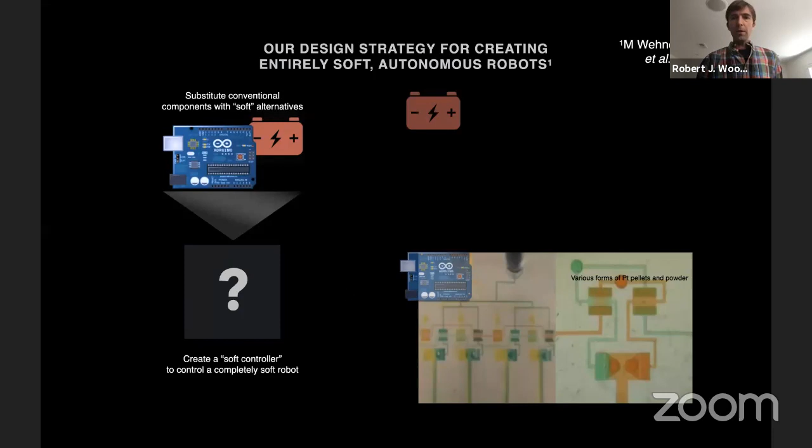So we settled on a couple of components to focus on. The first is power, and we basically used a monopropellant decomposition - a monopropellant fuel that decomposes in the presence of a catalyst and produces pressurized gas, which is perfect for downstream fluidic actuators.

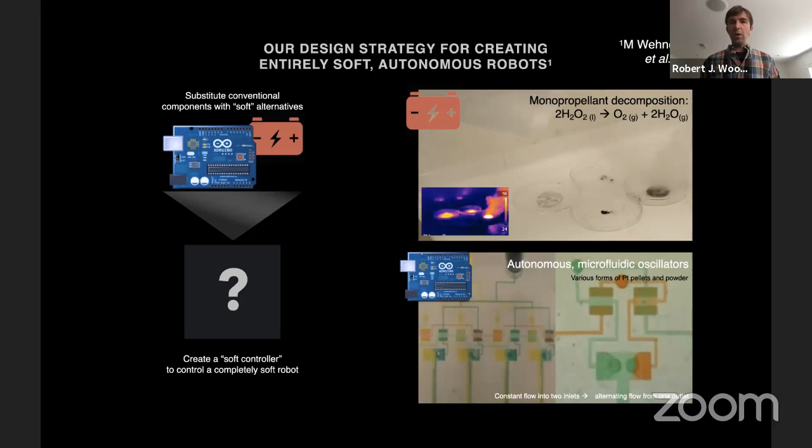For control systems, we looked to the extremely rich community of microfluidics and devices made using soft lithography techniques. What's shown here is a relatively simple structure, an oscillator. It turns out you can create fluidic analogies of a large percentage of simple electrical circuits: shift registers, oscillators, comparators, as well as simple passive components. This has been known for decades, so that particular revelation is not at all new.

But we can use that electrical analogy to start making control systems and power systems and assemble them together. The architecture we proposed looks something like this: fuel reservoirs fed into our microfluidic controller, in this case just an oscillator, through some check valves into a catalyst site, which decomposes it into pressurized gas and powers downstream actuators.

So that's all well and good. The next question is, how would we make such a device?

This is really where the brilliance of Jennifer's group blew me away. They had come up with this concept of embedded 3D printing. Embedded 3D printing, as the name implies, takes an uncured elastomer matrix. What you're seeing here is basically a mold, an inverted mold in the shape of this octopus.

This is an octopus because it's this de facto motivation, or inspiration, that people have cited in soft robotics over the last decade or so — the high functionality of octopuses, etc. So this is an inverted mold with an uncured elastomer, and what you're seeing here is a print head injecting a sacrificial ink.

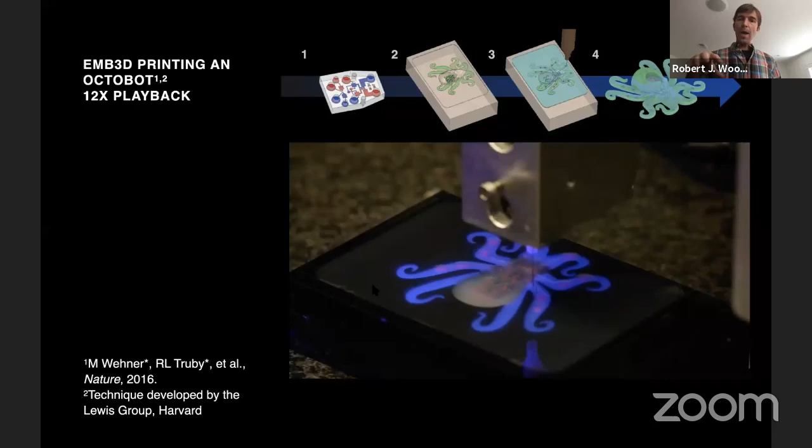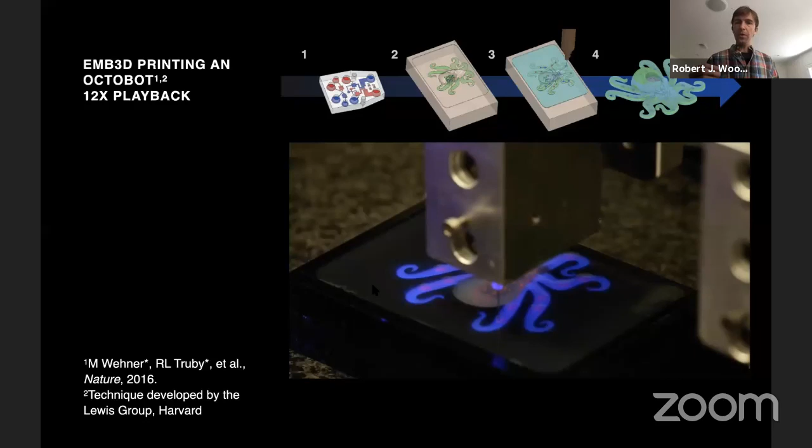This sacrificial ink is a pluronic which undergoes a reverse phase change. After the whole thing is cured, I've got this pluronic sacrificial material embedded within the vasculature of the now-cured elastomer matrix. This breaks down into just water, and that water evaporates through the porous network of this silicone elastomer matrix.

The last thing here, maybe hard to see, but within that mold is embedded a little microfluidic chip, which is the control circuit for this device — again, just a simple oscillator circuit. So here's this device. You can see all of this vasculature as these pink lines here.

We've taken that a little further more recently, starting to think about going back to some of the multi-layer laminate-based and folding-based approaches we had used to create complex rigid structures. Now we're doing this a bit with soft structures too, by virtue of a process we've made to create...

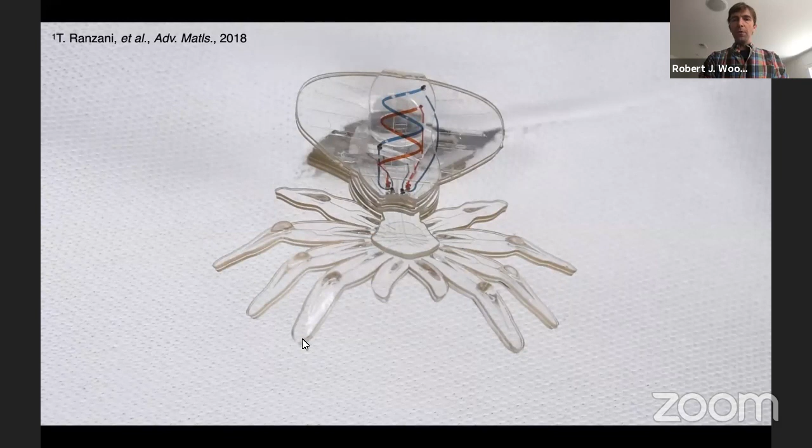The other interesting nuance of this process is that if we first flow a curable, uncured elastomer — say a UV-cured elastomer — into some of the channels, we can actuate this device to a particular pose we want, say a three-dimensional pose formed by folding, and then freeze it just by flashing UV light on it. Now I've got a quasi three-dimensional soft object, which can be further manipulated by pressurizing the fluidic lines.

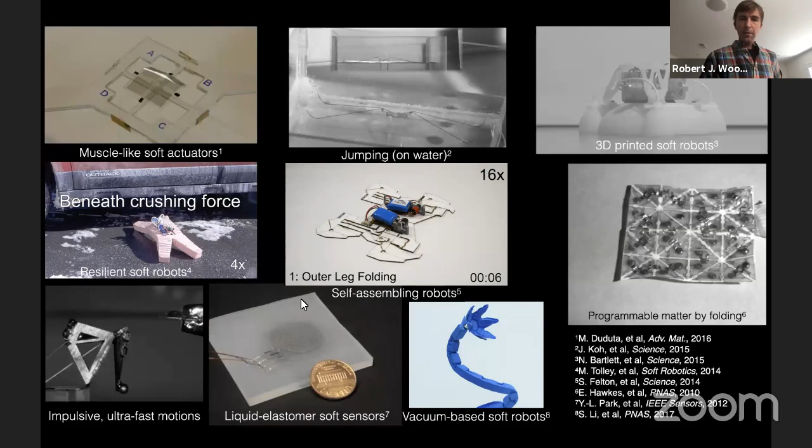Briefly, since I know I'm out of time, there's a couple of other things we're doing. I don't know which of these videos is making noise here, but let's just go one by one — oh, it's that one.

Okay, so I told you about muscle-like soft actuators. We've done some work leveraging some of the small-scale robotics we've made, and I showed you some techniques related to studying odd behaviors in a variety of insects and arthropods, like jumping off the surface of water.

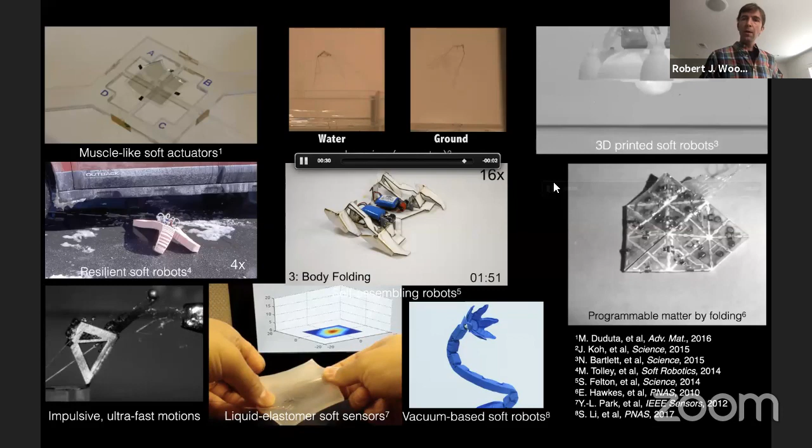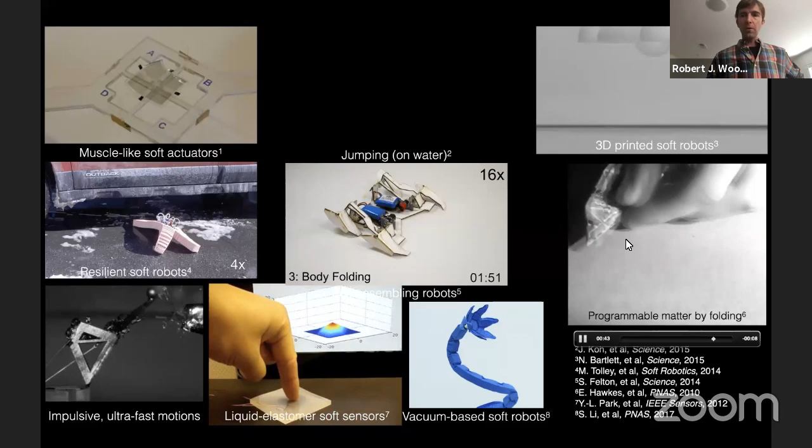We've created 3D printed soft robots. We've created robots based more faithfully on origami principles that can fold themselves, unfold themselves, form one structure — in this case, relatively simple — and act as a sort of programmable mechanical device.

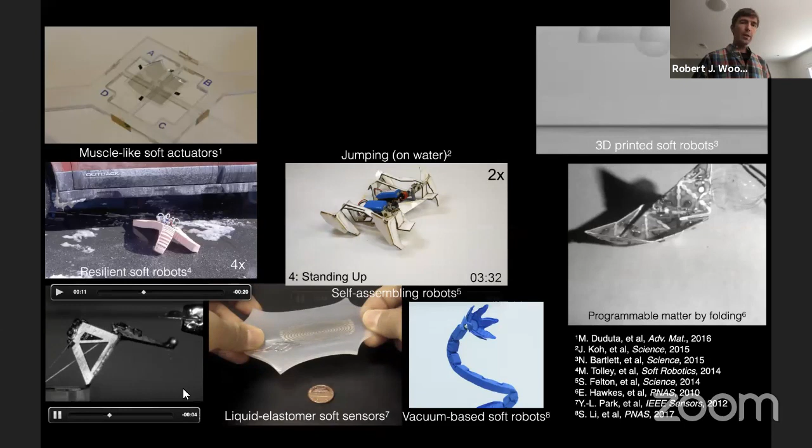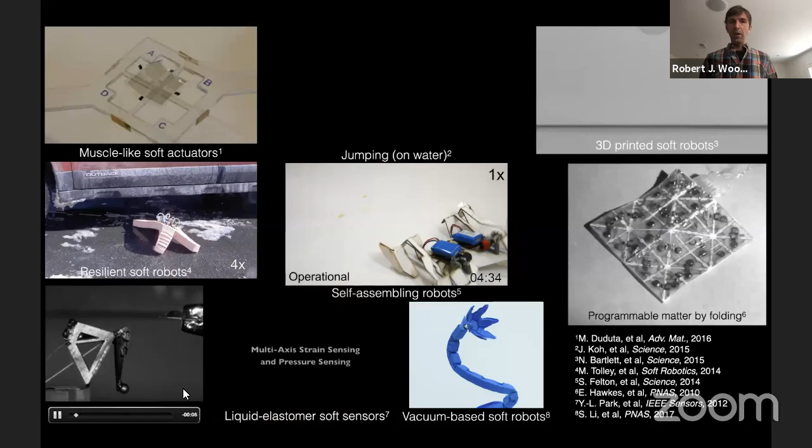We've also created origami-based devices which can fold themselves up and then walk away as sort of a self-assembly method. More recently, we're involved in a MURI that is looking at ultra-fast motions in biology and trying to create physical models which can help understand the energetics of these organisms, and then also be used for interesting robotics-like use cases in terms of jumping or punching or striking.

So hopefully this gives a decent overview of not just the types of things we're working on, but hopefully it was clear, the pervasive themes associated with a hardware focus on building devices which can have unique properties just by virtue of how they're made, how they're designed, and make some of these questions of control maybe a little bit easier, maybe coming one step closer to merging body and brain within robotic design, as opposed to thinking about them in isolation and then gluing them together.